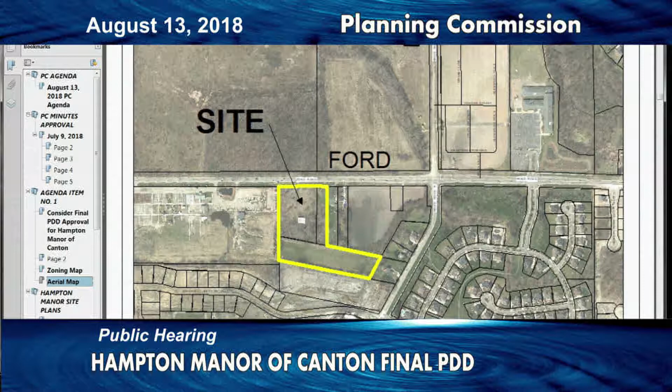Yes, the Hampton Manor of Canton LLC is proposing a 64-unit assisted living facility. It's about a 59,000 square foot building on the south side of Ford, west of Ridge. It's just east of Crimboli Nursery, and extends easterly towards Ridge Road along the drain line. The house on Ridge Road that's part of the existing parcel, you'll see on the map there, will be split off of it. The property owner is selling the remainder of the property to the west along with the two parcels on Ford Road to accommodate the project.

The definite benefits include provision of a sidewalk along the north side of Ford Road, which will provide walkable access along Ford to Patriot Park, connecting Parkside Estates to Ridge Road, provision of a transport van for the residents, enhancement of the wetland buffers by supplementing the planting and removal of debris and non-native plants, provision of over 68% open space on the property, which greatly exceeds the 25% minimum for a planned development, and additional parking over the minimum required for visitors.

So the preliminary plan development was approved by the Township Board on June 26th. The market analysis at that time showed a need and demand for senior housing, especially assisted living and memory care services. Traffic evaluation showed that with the new driveway to Ford Road the operational levels on that section of Ford Road will not be impacted. The driveway is far enough west from the intersection, and the hours of operation of the assisted living won't conflict with the hours of the school, which causes some traffic issues at that intersection in the morning and early afternoon.

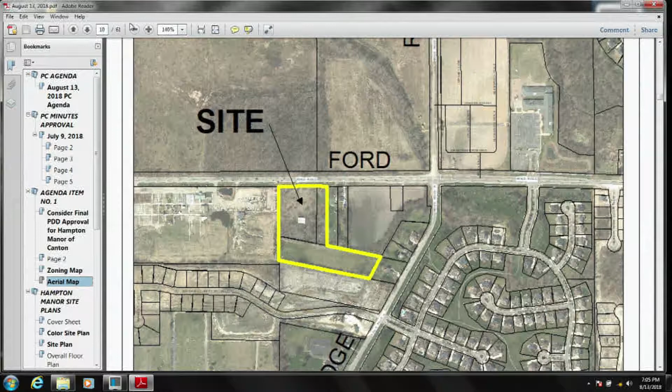The site plan is also in front of you, so the site plan that's part of the exhibit for the plan development is also what you'll be reviewing for the site plan review. Let me bring that up real quick. It's kind of the color conceptual shown here. The building is in yellow. The green areas are the open space areas, the blue areas, the pond area. There's some internal courtyards for the residents' rooms to front onto and to have outdoor access for their recreation purposes. They have kind of a drop-off, a porte cochere in the front for convenience of visitors and drop-offs, and then parking to the sides of the building.

The building is primarily masonry. They have 50% masonry on the building, and the rest of it is glazing or siding material. It's a combination of brick and stone, kind of an arts and crafts feel to it. So these are the elevations. We've determined that they meet the minimum requirements for masonry on those. The inside courtyards that aren't visible to the public are all sided, and the back of the building is primarily sided, but it basically is the service area. It faces the drain and the pond area, so nobody should ever be back there except for staff. Thank you, Jeff.

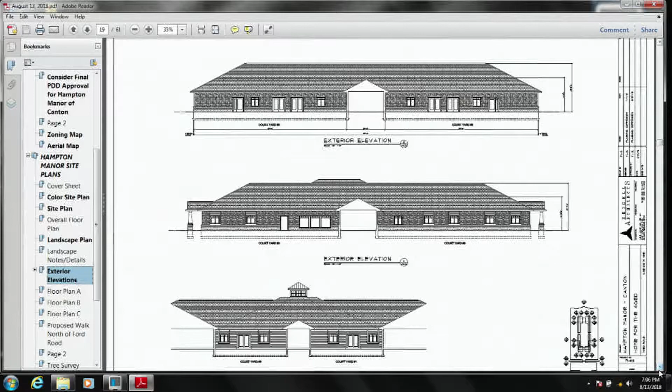There's several modifications that staff needs to look at. They still need to provide us a photometric plan for the lighting on the site. There's some final landscape calculations they need to provide for us. And the way they've handled the foundation landscaping on the plan: because the building is so long and it has areas all along the driveway and parking lot for foundation landscaping, and since a lot of the units are internal to the building, they've opted to use the commercial standard for foundation landscaping rather than the per unit factor

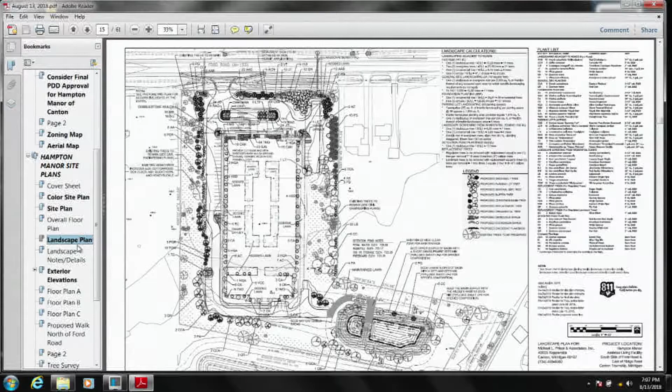for landscaping. If they had to have 2 trees for every unit, they'd have to have 128 trees around the foundation of the building. There's just no possible way to put 128 trees around the foundation of the building. So they need to add a modification into the plan development agreement. So your motion needs to include that modification as part of the PDD. And then we can take care of the site plan calculations once that's done.

But other than that, they've provided a looped water system, so there's 2 points of connection to the water system under Ford Road to provide for redundancy and pressure from a public safety standpoint. And other than that, they've pretty much completed the engineering, and so they're ready to move forward with this fairly quickly once the board grants final approval of the plan development and site plan.

So staff thinks it's a good project. They've met all the requirements from the preliminary plan in front of you tonight, and we would recommend approval of the plan development and site plan as noted. Okay, thank you, Jeff. Is there a project sponsor here? Or someone from the project? Would you care to come up and add anything to the project?

It's kind of hard to tell with this and the other drawings, but our buildings are very, very premier. Excuse me, just a moment. Who are you? Oh, I'm sorry. My name is Sam Martin. I'm one of the owners of Hampton Manor. And the previous projects we've done in the past, we always kind of exceed everybody's expectations of how we set up the exterior of the buildings, the landscaping. So everything will be very premier. It's kind of hard telling with these drawings, but once they get done, things get absolutely beautiful. Hey, it looks like a nice building from the drawings.

I think that the building looks very nice from the front, but my concern is that we see things in 3 dimensions, and I think it would be nice if we could add a couple of dormers to the side elevations that you'll see from the road, like the shed dormer that's on the front at the top. Would that be possible? Yeah, see how you have kind of between those peaks? Yes. Just like the shed dormer on the front. I'm not an architect, so I don't know. I mean, I can definitely. A lot of roof line without it. It kind of breaks it up if you put something up there. That's kind of why we had those dormers there, or the gables.

Well, they face wooded wetland areas, so from Ford Road, you're probably not going to see them, because one will face the wooded wetland that separates this between Crimboli and them, and then there's a wooded wetland on the other side that's being kind of preserved, so unless we do it up front. That's what I'm thinking. Can we at least do a porte cochere or something towards the front? Yeah.

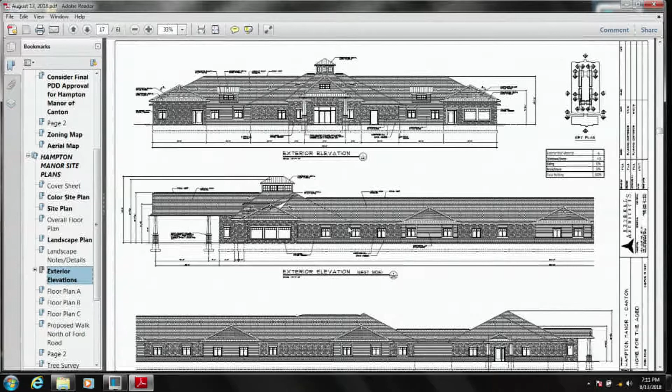Like, you know, between the first and the second gable on the front. So this would be the front. So you'd want something up, because this is a roof line here. I guess I explained what you want. So like the west elevation and the east elevation would...

Again, these drawings are hard to tell. When they come to life, they're beautiful. Just so you know, I am an architect, so I understand how to read drawings. Dawn, what would you like them to do? We want it as beautiful as possible. What would you want them to do with it?

I was thinking of putting a shed dormer about where that arrowhead comes down, above that second window. Just a shed dormer above that window, put one up in the roof line, like the one on the front. You're just saying there's too much space in between. It's too roof dominant. That's my opinion. I agree with that. Is that a major deal?

We're talking fake dormers, so. Right, we're not talking about... I've never had it on any of my other buildings, so I can't say I wouldn't do it, but we can definitely throw it at our architect and see if he can put something on there. So you want a dormer like the one on the front, on each side of the building? On the upper portion of the roof. I'm sure when you talk to the architect, they're gonna know exactly what to do.

You want it up here, Dawn, in between these two windows? Yes. Between this point and this point, put a dormer up in the center point, above that middle window, right in there. That's a roof line that comes out, and this roof line here. Well, right here there is, but not up here, Sam. She's saying up above the window. That dashed line should be the roof beyond. That's not on this elevation.

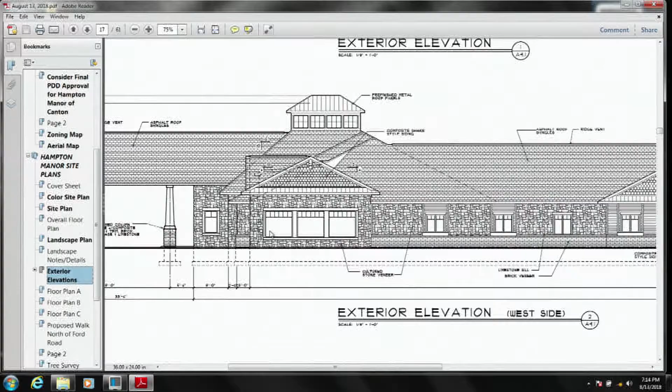Okay. So I think what you're saying is there's a lot of roof line between here and here, and you just want that broken up at the midpoint. Right. The line that you're showing, Sam, is not part of the side; that's not the external roof line, that's an internal roof line on the other side that goes down where the courtyards are. Jeff, could you put the north elevation, or the entrance elevation, up just to help illustrate?

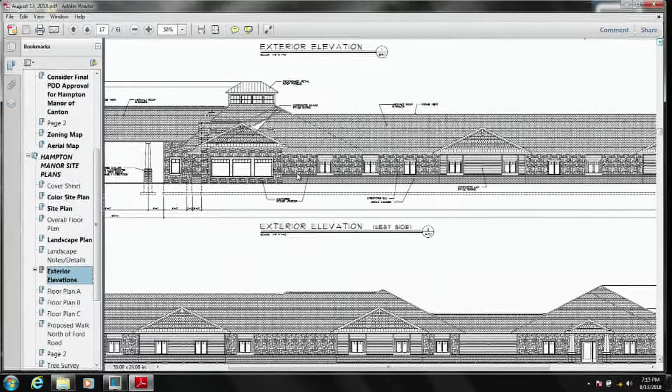Looking at this from the side, this is an internal roof line too. Same thing, that's the back. You just need something between here and here that breaks that roof up. If you look at the front from Ford Road, you have a lot less roof line there, but you've got those dormers up there. We're talking about breaking up a much more expansive roof. I'll work with them on it.

Okay, so something like this? No, not that. That's not what you were referring to, right? Something like the ones on the side. Right, you want the shed dormer, not the gable dormer. That's correct. Okay, all right. I like those shed dormers.

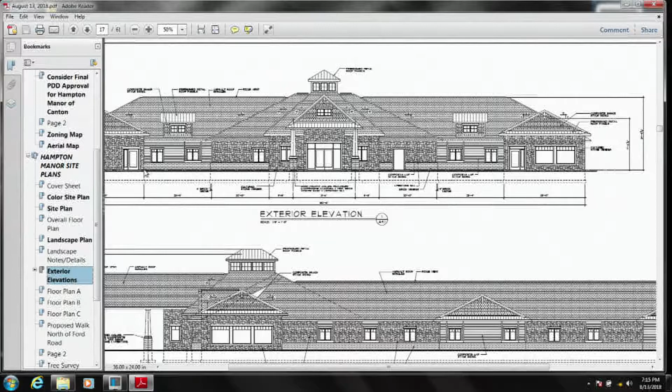You know, there's really a lot of trees along that west property line that we're leaving. There is nothing invisible in Canton any longer. Trees lose their leaves. This is the north part of the building. I wonder how much of it you can see. Pull up a bird's eye view again. When you're coming in, or driving through the parking lot even, you're going to see this building. It'd be right here.

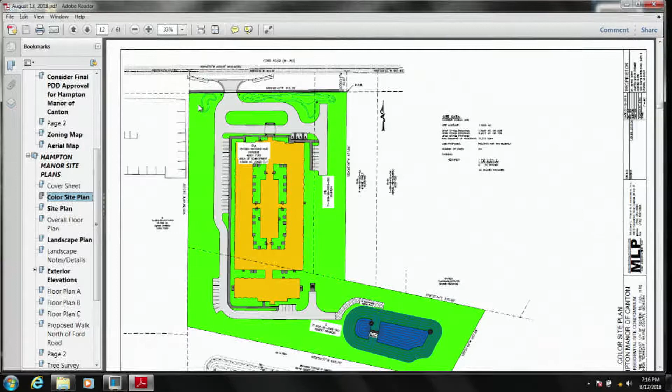It's on the parking lot side of the building. I got you. I think it's a small amount of extra cash for something that's gonna make your building nicer, so. Yep, I totally get it. Okay, thank you. Yeah, no problem. I just couldn't picture exactly, but no, I got you.

It's that shed dormer, so in the way the parking lot comes in, it totally makes sense. Okay. Yeah, absolutely. And I'm hoping both sides, but just on the front part. I think to even it out, they might do one on each side. I don't know, but I don't see it being a problem. I think it should be on both sides.

There's parking on both sides, so one on the east and one on the west. I think you were just saying the front and the back of the building. Well, no, he's saying now he would do both east and west. I'm thinking if you're gonna do one, you might as well do two, right? It's a symmetrical building, keep it symmetrical. Okay.

Anything else, Commissioner Zuber? No, that was it. Commissioner Engel? I think it's a very nice building. Commissioner Acharya? No question. Okay. My concerns were with her, and the building looks nice. I think it's going to be a great addition, and definitely the use is going to be great for Canton, so. Thank you.

So with that said, do we need to discuss anything then about the site plan? Well, that was the site plan issue. We already went through the site plan basically last time, right? So the only thing you need to include in your motion on the site plan and the PDD is the landscape modification in terms of which standard we're going to use for foundation landscaping, and then the other issues are staff issues that we'll resolve before it goes to the board.

All right, somebody would like to word that? I just wanted to verify, so the motion will include wording about the dormers, correct? I thought you wanted that to be a staff item. Well, if it's going to be a condition of planning commission approval, you need to add it in there so that we can evaluate it and make sure it's there before it goes to the board. All right, so I'll attempt to make a motion then. Go ahead, fire away.